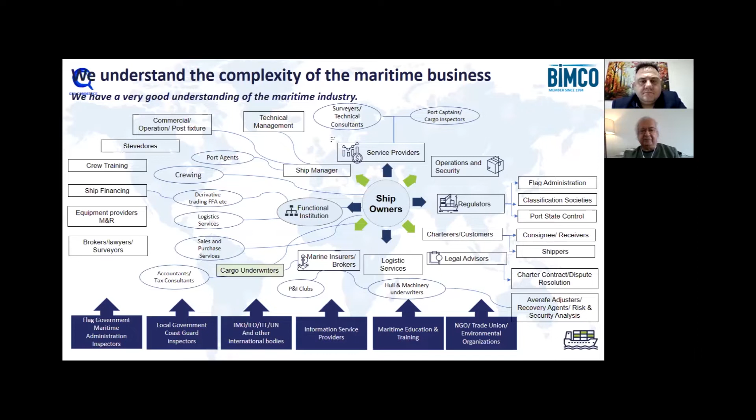Because of my involvement in the industry, I understand the complexity of the maritime business and the interactions of the ship owners with first-hand experience, because I have traversed all the segments. We offer technical support services, especially in China with our strategic partner there, and all sorts of aspects which are listed here, plus in India, Middle East, and Americas.

Now, this is the executive summary of my presentation. Please do not believe in anything simply because you hear it from somebody. Don't believe anything because you see it written somewhere. But after observation and analysis, when you are convinced that anything agrees with reason and is conducive, then only should you follow that. Basically, what I'm trying to say here is that everybody has got an opinion and everybody wants to try to sell you something. I'm not selling anything because I'm not employed by the methanol industry. But I'm telling you from my personal experience as a ship owner about the benefits of methanol as a fuel.

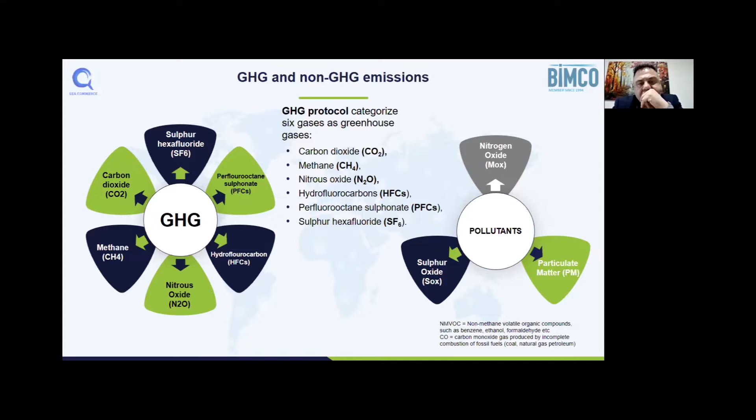There are two types of regulations: one deals with greenhouse gas, which is right now on the decarbonization side. The other one was the pollutants, where the new regulations finally went into effect in 2020 for SOx, NOx, and PM. Now the focus is on decarbonization: carbon dioxide, methane, nitrous oxide, and hydrofluorocarbons. So the 6 main GHG gases.

The international shipping GHG footprint is 2.7% of the total global CO2 footprint. But it is one of the most heavily regulated industries. And for the regulations which come up to be applied to the ship owners, in my personal opinion, the ship owners are not given a proper time frame to make the adjustments, because it's not a cosmetic change they have to do on the ship, but they have to do major modifications to the engines and all that.

And sometimes, because the ships have got an earning life cycle, if they're close to finishing off their earning life, the banks will not be able to help them finance these changes, which may cost them tons of money. So now the reductions for IMO goals are focused on GHG. IMO wants to reduce the carbon intensity in comparison to 2008 by 40% by 2030, and by 50% by 2050. So all the regulations and all the decarbonization efforts are based towards that.

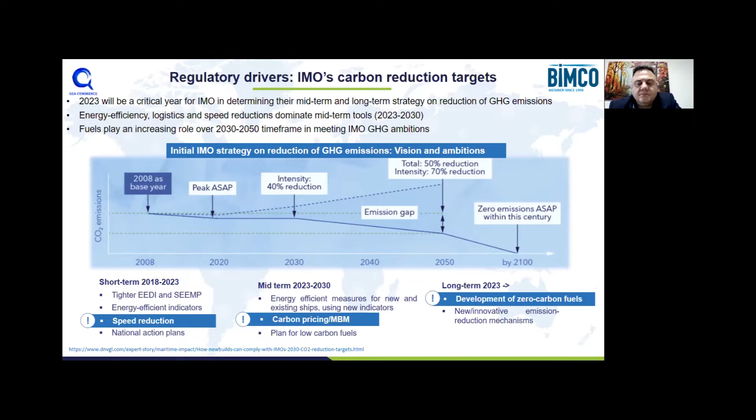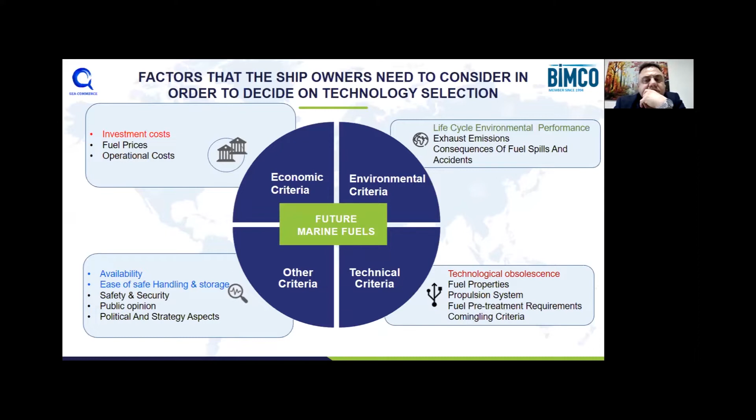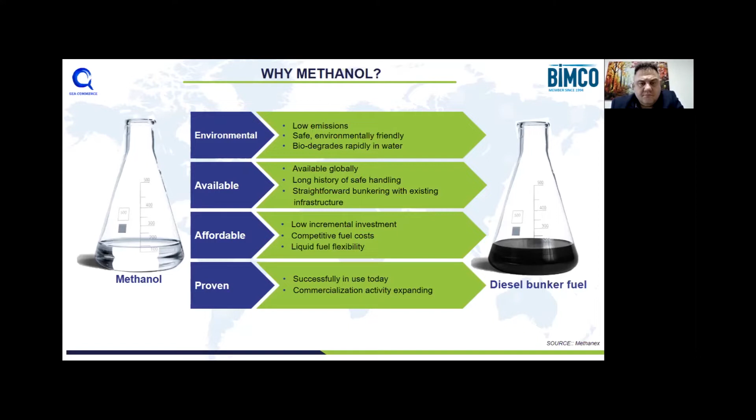Why methanol? Environmentally, it's low emission, safe, environmentally friendly, and rapidly biodegradable in water. Availability: there are 122 ports where methanol is available, and a long history of safe handling, because the methanol trade is close to about 50 million tons a year, and it's been handled on ships for time immemorial now. And the investment cost is pretty competitive when you compare to competing fuels like LNG, ammonia or hydrogen. Methanol is very competitive, and it's a proven technology.

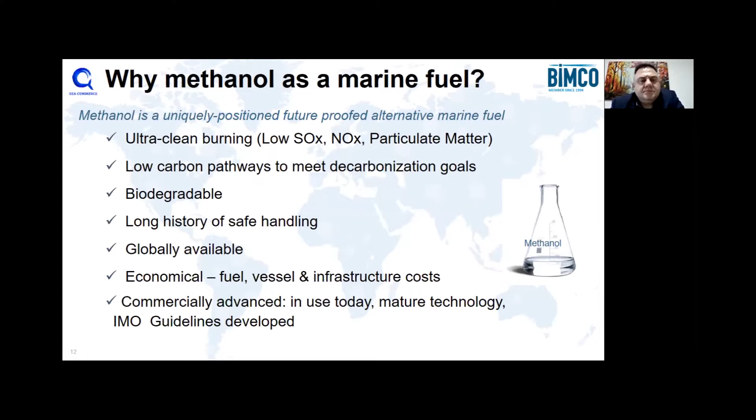Methanol as a marine fuel is ultra clean burning, with low carbon pathways to meet decarbonization goals. I mentioned biodegradable in the previous sheet, long history of safe handling, available, and economical fuel, vessel, and infrastructure costs. About methanol, the total production is 98 million tons, produced from natural gas as a feedstock. There is 30 million tons which is produced through coal to methanol using coal as a feedstock, and basically all that 30 million tons is done in China.

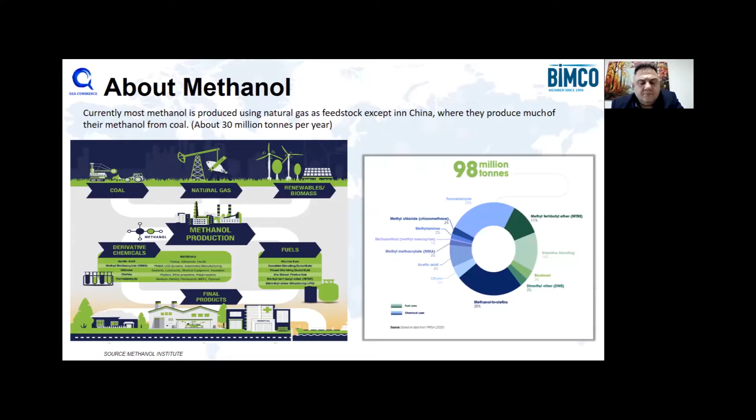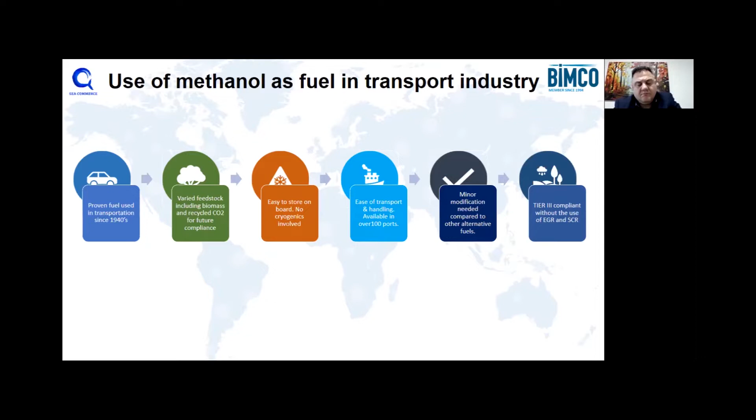For the fuels which are available, the fossil fuels are the cuts of the crude barrel, which is on the left-hand side. From there, you produce fuel oil and diesel oil or gas oil. And from natural gas, you produce LNG, natural gas, methanol, ammonia, and hydrogen.

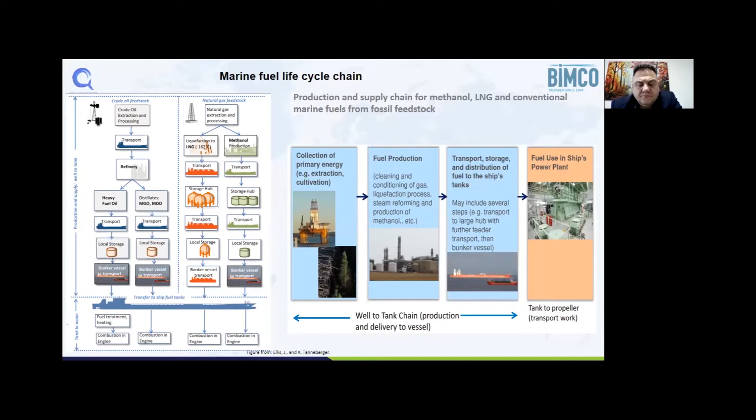Principal pathways for the methanol productions. There are 4 ways to produce methanol. One is the coal, which is called brown methanol. Then there's from natural gas, which is called gray methanol. And then from renewable electricity, what is called e-fuels, which is called green methanol, and the biomass.

So different feedstocks are used for all this. Like for example, for the renewable methanol or the e-fuel, you use wind power or solar power to produce in order to achieve the zero carbon footprint.

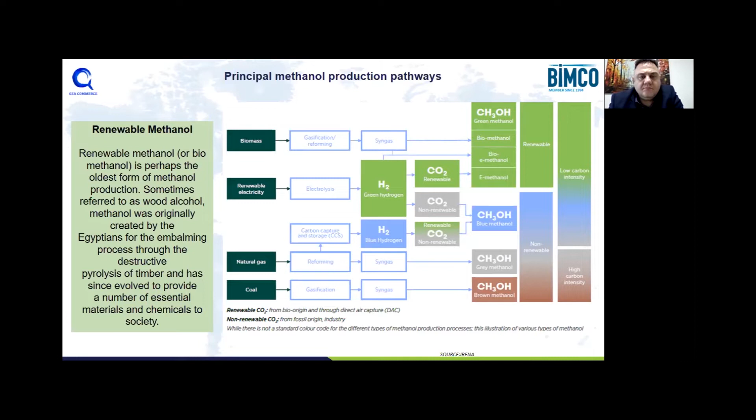The gray, blue, green methanol production cost: the current fossil fuel gray methanol cost is given in the gray in the bottom, and in comparison to that, the green and blue methanol production costs are given for comparison purposes.

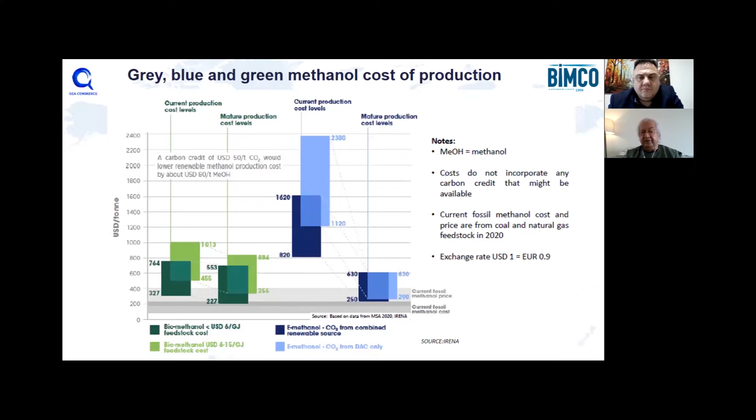Just 1 second, please. I need to move this because it's blocking my view. Yeah.

This is the main factor for decarbonization. If you look onto the left side, the bar, which is GHG emission as gram CO2 equivalent per MJ fuel consumption. The MDO is the threshold, and then LNG without the methane slip is what you see always when people talk of LNG. They show you the LNG with 0% methane slip as the second bar, and LNG with methane slip is the third bar.

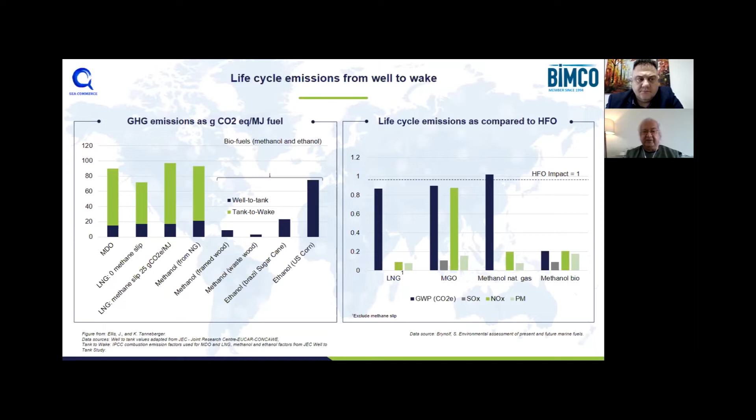On the production side, another thing which is mentioned all the time is the capacity; this is the development of the capacity. It's not much of an interest right now, but it will be where the capacities are being added. If the methanol as a marine fuel demand picks up, it's not difficult to establish new facilities, because I've talked to the various major producers and they are willing to do it. It takes 2 years to get the production going, let's say 10 million tons or 20 million tons, whatever is required for the future needs.

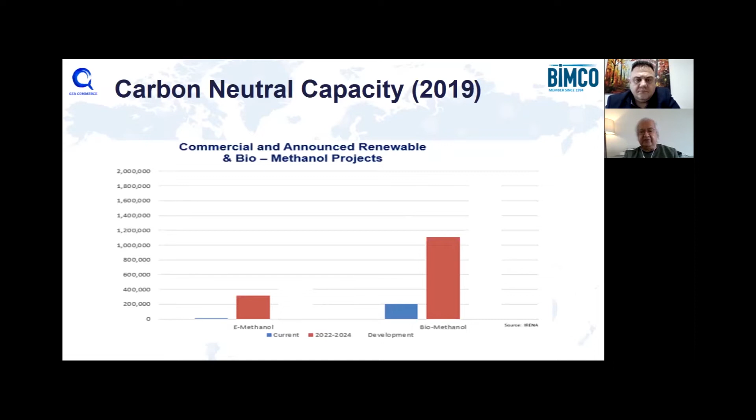Now this one reflects the commercial and announced renewable and biomethanol projects. Renewable using wind energy, or biomethanol using the biogas or the forestry waste or the wood waste, as I mentioned. These are the announced projects for that.

Low cost infrastructure, capital costs, and the payback time on the investment on methanol, new or retrofit, according to EMSA, is 2 to 3 years payback, because of the simplicity of the fuel; the fuel characteristics are the same as the fossil fuel.

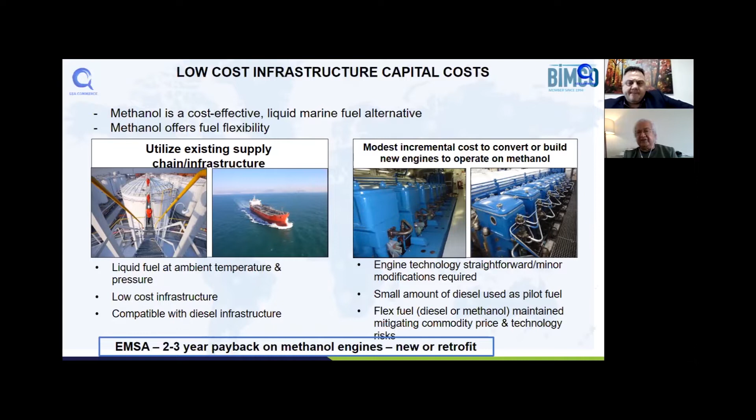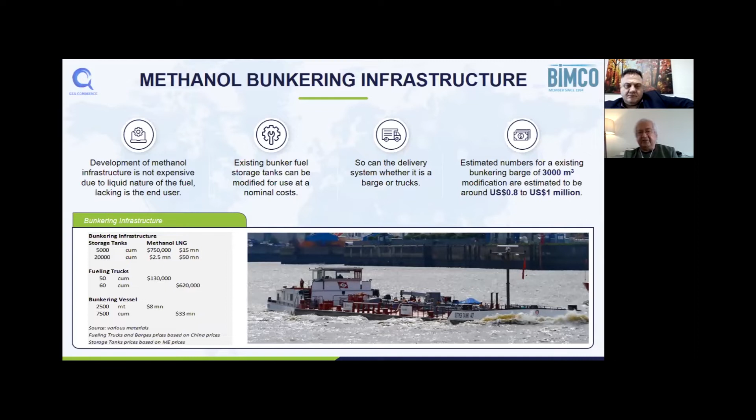The ship in the background is a Methanex Waterfront ship. The bunkers were delivered to it on an existing bunker transport barge. There was no modification done to the barge, and it was allowed by the Port of Rotterdam to deliver bunkers to this ship. I think it was in May of 2021.

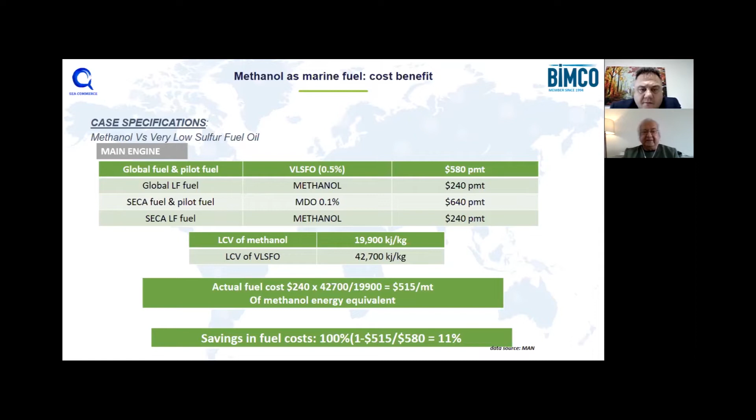This slide is from MAN. If you calculate on the LCV basis, very low sulfur fuel oil's calorific value is 42,700 kJ per kg. Methanol is 19,900 kJ per kg. If you do the mathematics, these are 2-year-old prices, which are not applicable today because prices have gone up, but the delta is the same currently. The saving in fuel cost for using methanol in comparison to VLSFO is 11%. Methanol is better, 11%.

Now I talk about the investment costs. On 2-stroke 50-bore engines, let's say for an MR2 new build, approximately the delta between a fossil fuel ship and a methanol ship is $3.5 to $4.0 million. Retrofit is $8 to $9 million, but needs a parent engine test. If the parent engine test does not exist, this price will be higher. It depends on the OEM, how much they want to charge.

What are the additional things on a methanol dual fuel engine? Approximately the LFSS, day service tank with accessories, pump room, housing and ventilation, fuel valve train, double wall piping, ventilation, gas detection system, additional firefighting systems, and tier 3 technology. The equipment is not required. So basically, methanol, when you mix it with water, can comply with the tier 3 requirements, and that does away with the SCR and exhaust EGC systems, which gives a benefit of close to about $2 million savings on the new build cost.

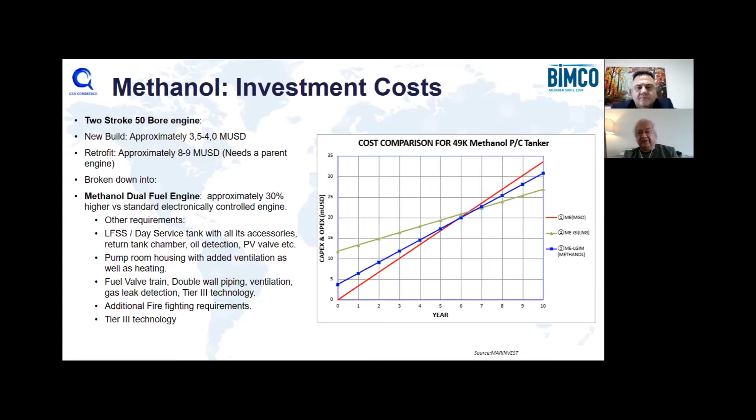Now, the greatest advantage of methanol is that the methanol molecule, whichever way you produce it, whether it's brown, gray, blue, green, has got the same energy and chemical characteristics no matter how it is produced. So what we are trying to say over here is that gray methanol today has a saving of 10 to 15%. By mixing it with blue methanol, the savings will be higher. And similarly, mixing it with green methanol, the savings will be up to 90%. So if the threshold is 60% reduction in CO2, you adjust the mixture accordingly without doing any modifications to the engine, and you will be able to achieve those savings.

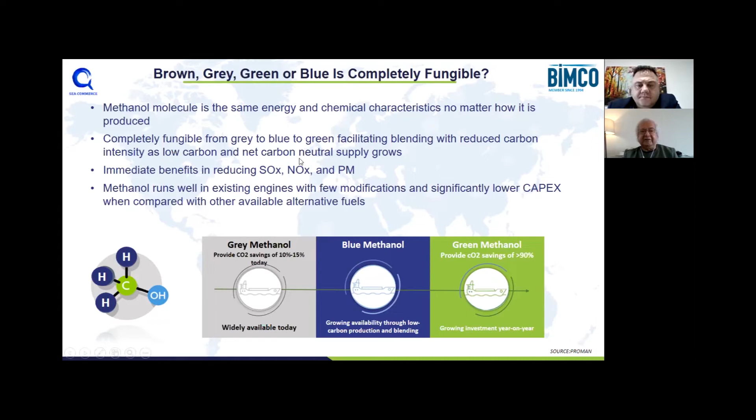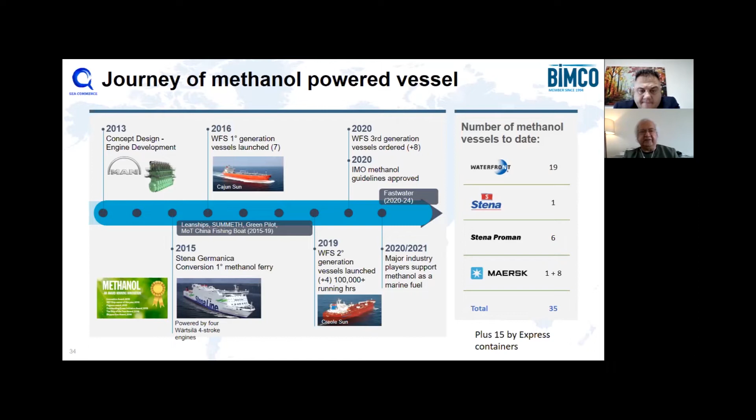More and more companies are getting interested. Just today, COSCO has come out with the design for a methanol-powered VLCC. It was announced today. And currently, there are about 50 ships on order, because Maersk has got 9, plus 15 were ordered by Express Container about a month ago. So there are about 35 to 50 vessels which will be methanol-powered vessels in 2023. And there are companies interested in ordering methanol-powered vessels. So there is a tremendous interest now in methanol-powered vessels.

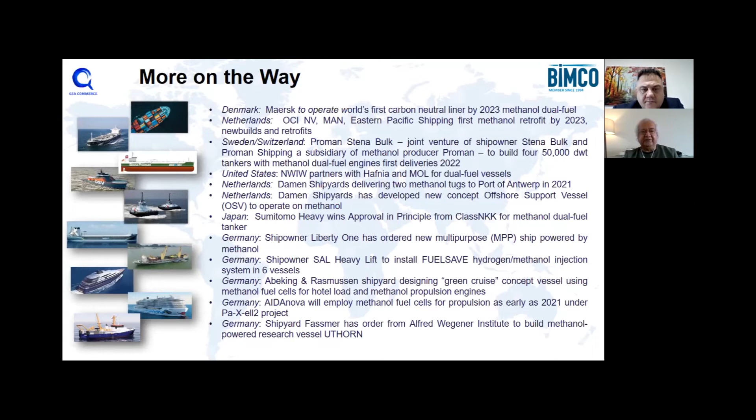Even the companies which have LNG-powered ships are also looking at methanol. For example, Hapag-Lloyd converted one of their ships, which had the class rating of LNG ready at the time of construction in 2014, and went in for conversion to LNG. It cost them 2 years in the yard and $35 million to do the conversion.

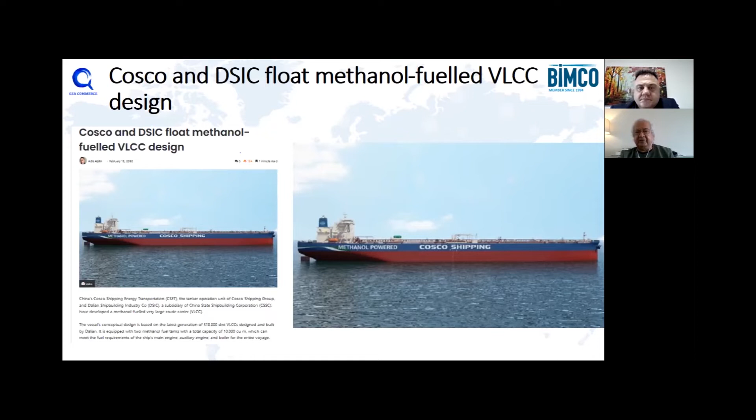Yeah, this was announced just today. COSCO and DSIC float methanol fuel VLCC design. China has got a methanol policy that they want most of the transportation to be using methanol by 2050, and they are working towards it. And I think this is a major shift, a major impact COSCO will have on the methanol-powered ships order book.

I'm going to talk about the Mari Jone and Mari Boyle. These are the first two methanol-powered ships, built by Marinvest. And there are some performance slides I have put over here for the attention of the Turkish ship owners here.

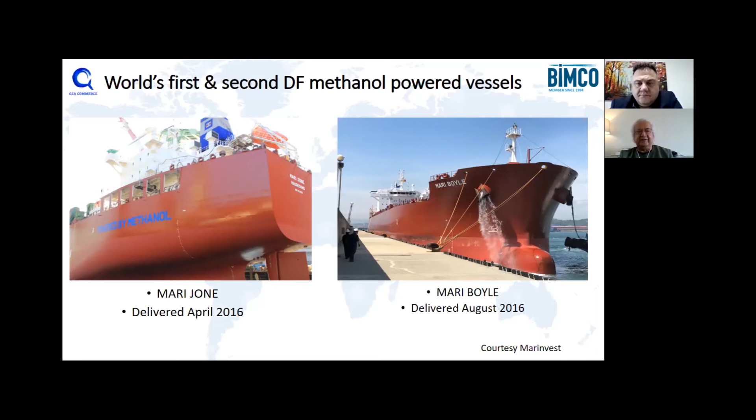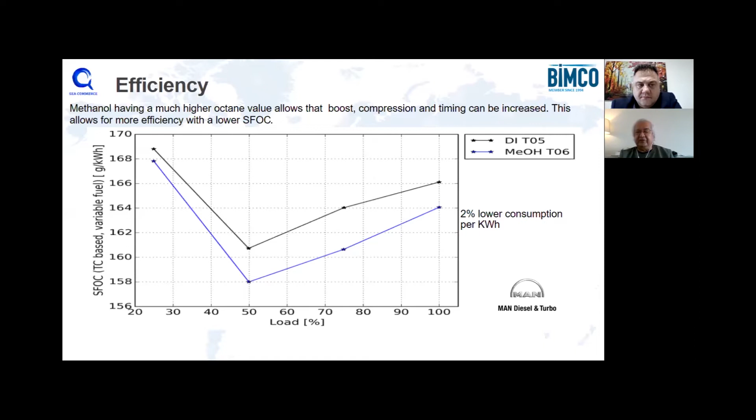Efficiency: methanol having much higher octane values allows that the boost, compression and timing can be increased. This allows more efficiency with a lower SFOC. So it's 2% more efficient per kilowatt hour than if you were using MGO or LSFO.

On the road, this company, Marinvest, has got 40,000 hours of experience operating these vessels. And I will read what Fredrik Stubner, the Director Technical and New Build, has to say. Our ships continue to operate on methanol on a daily basis, so it's full-time methanol operation. Although the engine is called dual fuel, basically it runs on 3 fuel options: HFO, LSGO, and MeOH. This gives flexibility in many scenarios that benefit stakeholders.

That basically means that if gas oil prices are cheaper than methanol, then you can change over, you can use gas oil instead of methanol. If methanol prices are cheaper than gas oil, you take advantage of the pricing on that. With an average 3.5 to 5% of primary fuel burnt at sea on a daily basis, these engines are the best in terms of emission control.

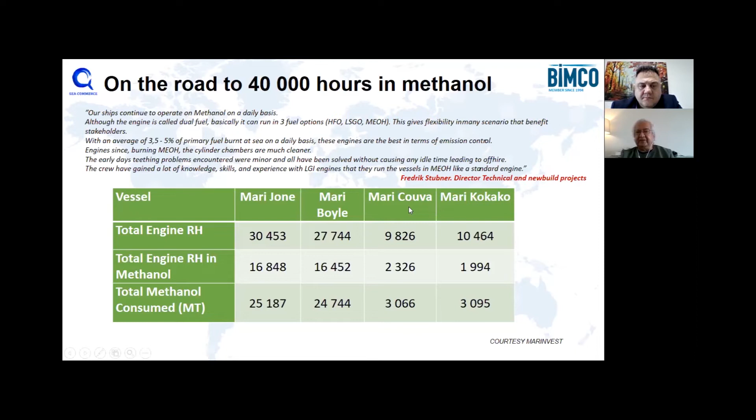Engines, since burning MeOH, the cylinder chambers are much cleaner after 4 years of experience. The early days teething problems encountered were minor and all have been solved without causing any idle time leading to off-hire. The crew have gained a lot of knowledge, skills and experience with LGI engines that run the vessels on MeOH like a standard engine. And this I'm quoting Fredrik Stubner, the Director of Technical and New Build Projects.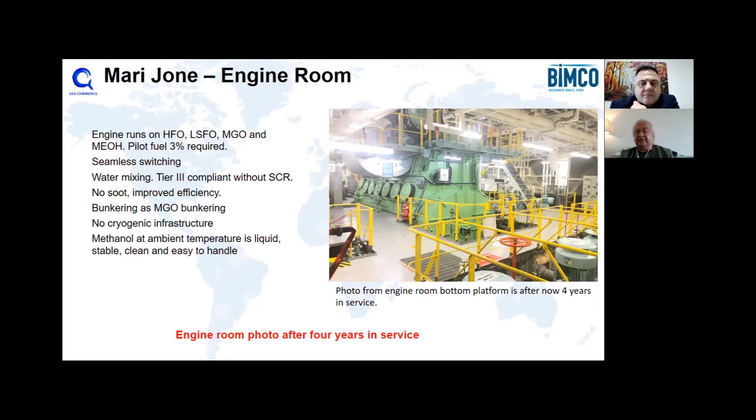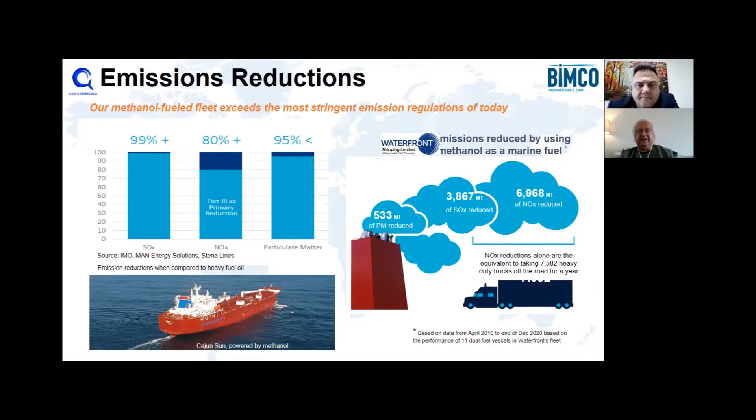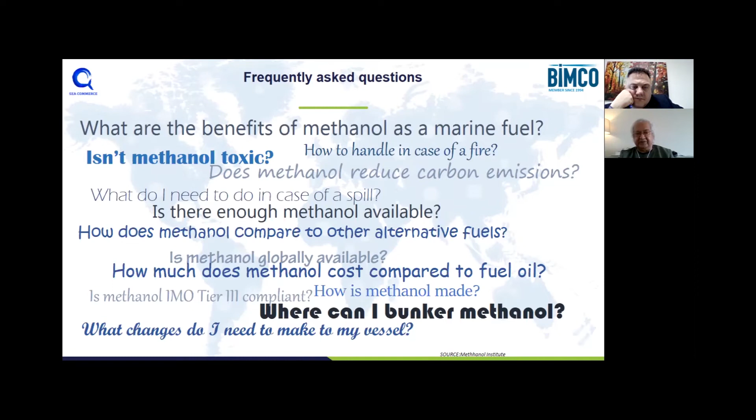So what about the other pollutant side? Methanol reduces SOx by 99%, NOx by 80%, and particulate matter by 95%. Now, what are the benefits of methanol? There are various questions which have been asked constantly of me whenever I present or when I'm holding my seminars. I don't have time to deal with all of them individually over here, but I will deal with some of them going forward.

One of the things which you constantly hear is that methanol is extremely corrosive and it causes corrosion to the engine room. Now, this quotation I have over here is from MAN. They say corrosion is not an issue, even though methanol is corrosive. No changes to the corrosive level in the combustion chamber are expected when using it as a fuel in standard engines, nothing special. Already today, we have quite a corrosive environment in the combustion chamber, and the combustion chamber is designed to cope with it.

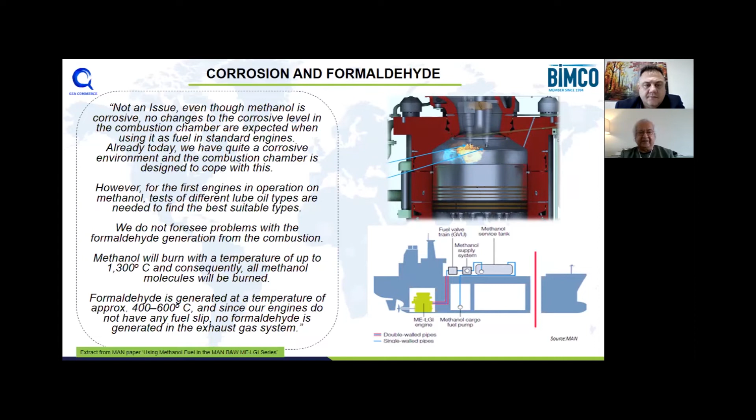Methanol will burn with a temperature of up to 1300 degrees Celsius, and consequently, all methanol molecules will be burned. Formaldehyde, which is the reason for corrosion, is generated at a temperature of 400 to 600 degrees Celsius. And since our engines do not have any fuel slip, no formaldehyde is generated in the exhaust gas system. So the corrosiveness talked about by the competing fuel providers is not an issue at all, according to MAN.

If you look again at the hazard part of it, at the pictograms on the top comparing methanol, diesel, and gasoline, methanol is less hazardous than gasoline and diesel, as the slide reflects. It is not more dangerous than other fuels, gasoline, diesel or LSFO.

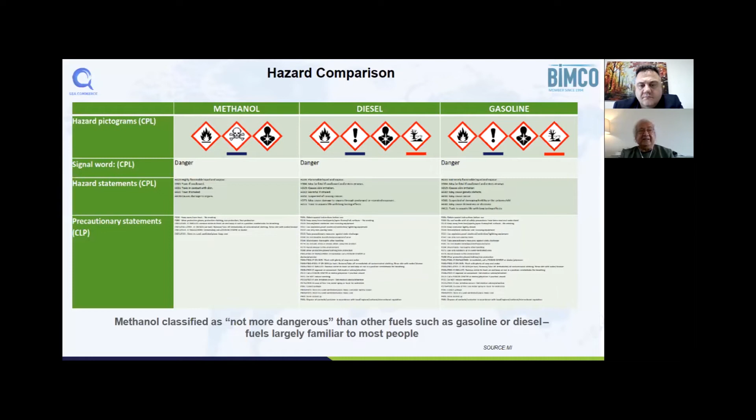Methanol is fully miscible in water. It is soluble in water. So if there is a spill, here we have got LC, the lethal concentration, which is the threshold when half the population of marine life will die within a specified test duration.

It will require 15,400 mg per liter of methanol spill to achieve the level of LC50. Whereas gasoline was only 8.2, diesel is 65 mg, and methane, which is LNG, is 50 mg per liter to achieve the lethal concentration of 50, at which the marine life will die.

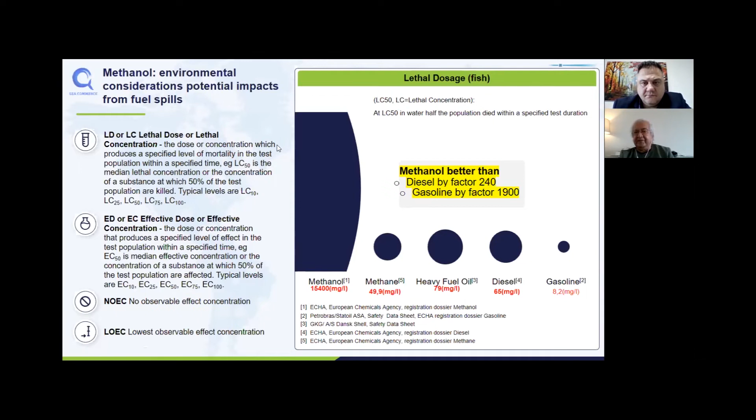Now, the next slide here shows that when the accident with Erika happened, the tourist industry suffered $400 to $500 million, claim for damages $120 million, 60,000 birds were killed, fishing industry $98 million, cleaning in hundreds, and on and on.

Methanol tested with 10,000 tons on the simulation. Release of 10,000 tons of methanol at open sea, the concentration was 0.36% after 1 hour. It's basically soluble in water, so it dissolves, and there is no threat to the marine life as such.

Similarly, simulation second: release of 10,000 liters per hour from a coastal pier. The concentration was 0.36% after 1 hour and 0.13% after 3 hours. So what I'm trying to say is there is zero spill possibility with the use of methanol as a fuel. This will have an impact on your blue card also for oil spills and all that, and shipowners should discuss that with the insurance companies.

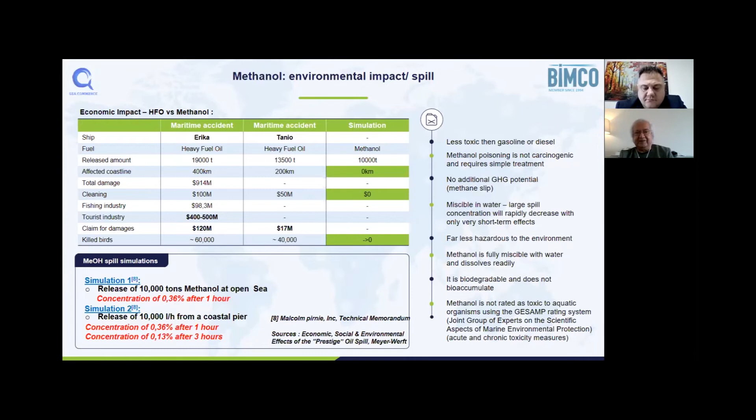This is another thing: methanol, because the storage factor is twice that of fuel oil, 2.16 times, requires more tank space to store. And that will restrict the sailing distances.

But no, it would not actually restrict the sailing distances, because when we do voyage planning, we don't take the full bunkers, we maximize the cargo intake, and then we bunker the vessel on the way somewhere in order to maximize the cargo intake. So the same philosophy can apply to methanol.

And secondly, methanol, because it does not have a risk of pollution, it can be - for example, right now Methanex is using the slop tanks as storage tanks also if they are going on a longer duration voyage. And it is approved, and there are no issues with the Coast Guard or anything.

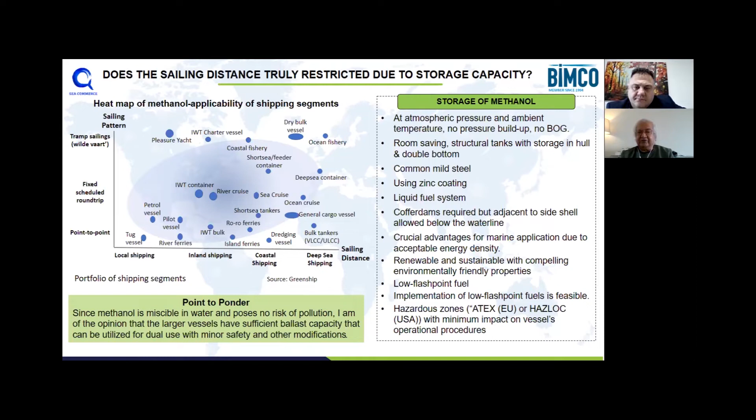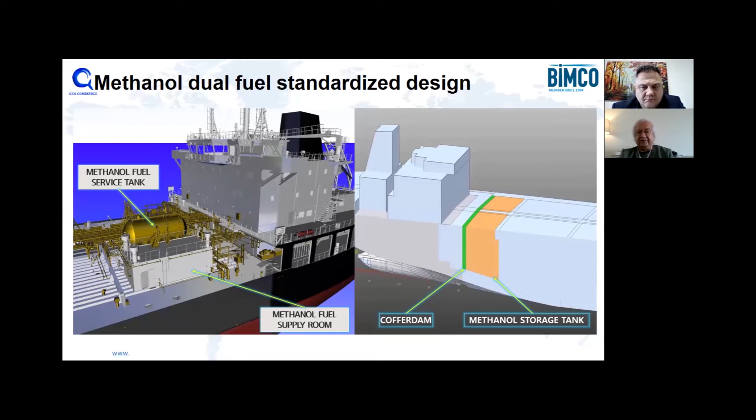This is a methanol dual fuel design, which has been already there for MR. You can see that there is a cofferdam and methanol storage tank, between the accommodation and the methanol storage tank. Basically this is already there, available. Today you saw the VLCC design has also come out.

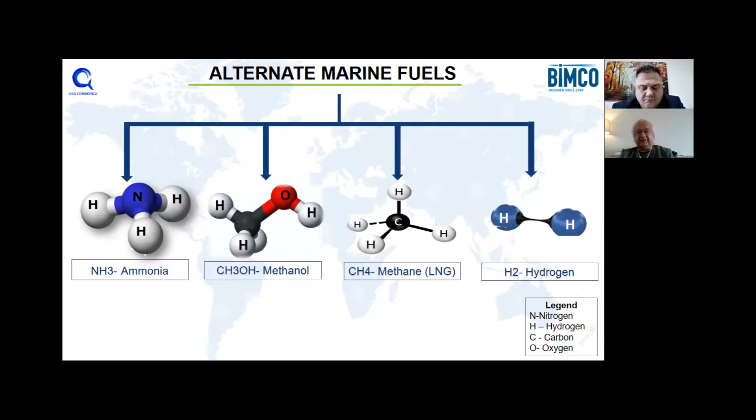But overall, methanol is also competitive on that one also.

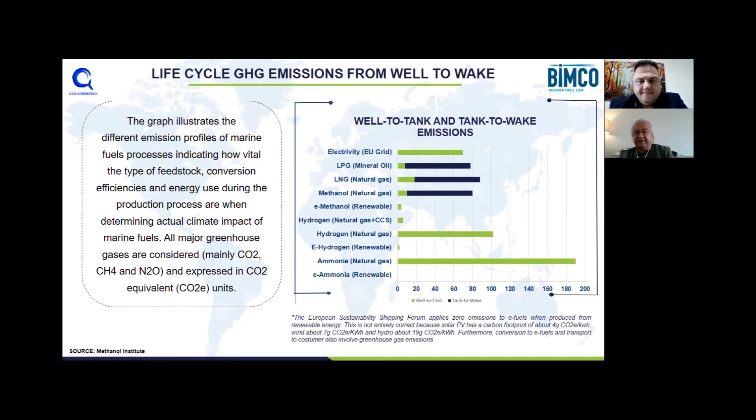Now, technology readiness level, TRL: diesel is of course 9, liquefied gas is 8, methanol is 8, but hydrogen, liquefied hydrogen, ammonia is 3 to 4. That still has to go a long way. The first prototype, the engine, will be ready for ammonia, set to be in 2024 and 25. It will be on the test bench. So by 2030, when you have to reduce the GHG footprint under the IMO regulations, I think it will require another 10 or 15 years before the technology is going to be mature enough.

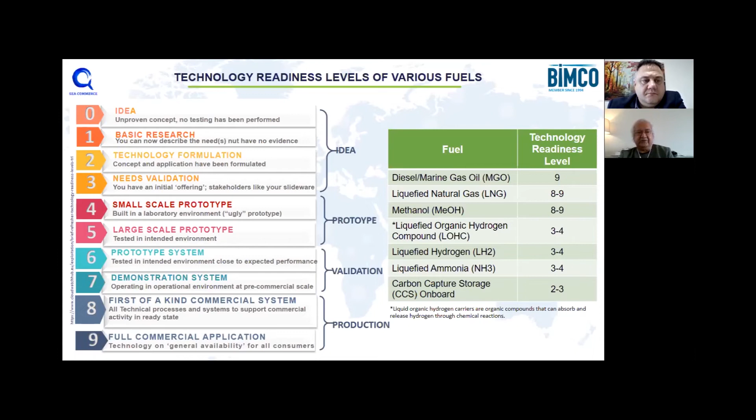This is a very important slide. Once again, yes, LNG has got a higher calorific value when it comes to per ton basis. But on the ships, you use the volumetric energy on the basis of volume. So this slide reflects the energy per volume of tank system.

Because if you have got a 10,000 cubic meter tank for LNG, the space is wasted over there because it has to be double skin, then it has to have a protection coating inside, and the calorific volumetric density of LNG reduces from 22 to 16, which is similar or sometimes less than methanol, which is 15.9 on the volumetric basis. So diesel is the perfect fuel because on the volumetric basis, MJ per liter, it's got a volumetric density of 35, 36.

Methanol is next. And then all three fuels - LNG, liquid ammonia, liquid hydrogen - they are all cryogenic fuels, which basically means they're carried at below 0 degree temperature, and they require special handling plus special equipment and everything.

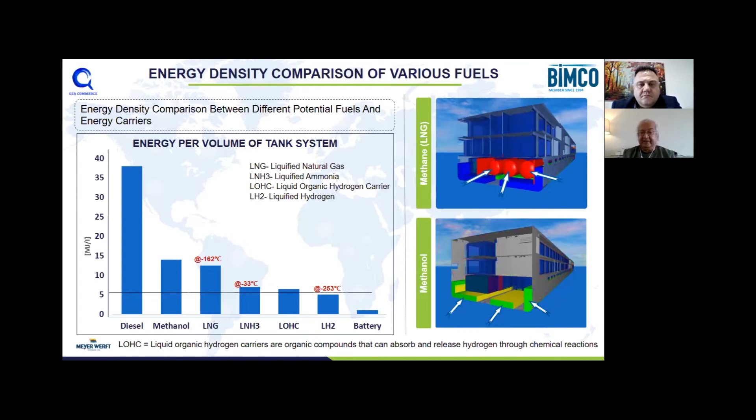Here I'm doing a comparison on LNG. There are various things which people do not know about LNG. I cannot talk on all of them right now, but I will talk on some of the important things which have got an impact on pricing, like custody transfer, methane number, and other differences.

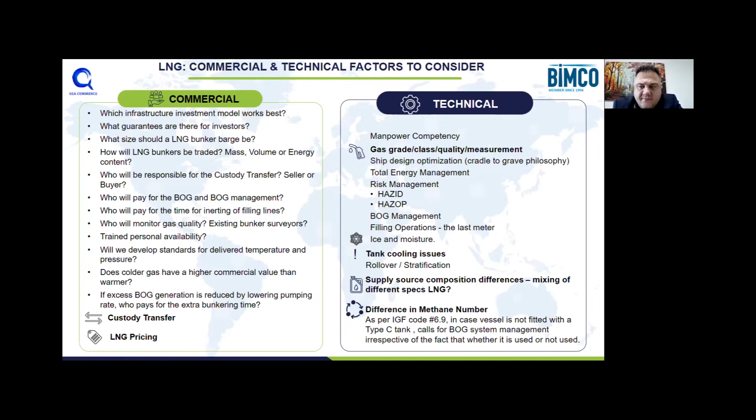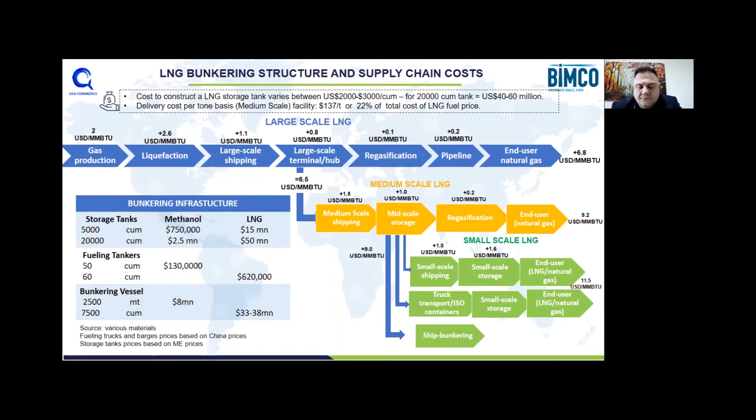Because LNG, when it is pumped out, has got gas in it, like the cappuccino effect on fossil fuels, there are losses that occur from there. Those losses were, for example in 2010, 440 million euros for LNG transfer, or 200 million tons of LNG.

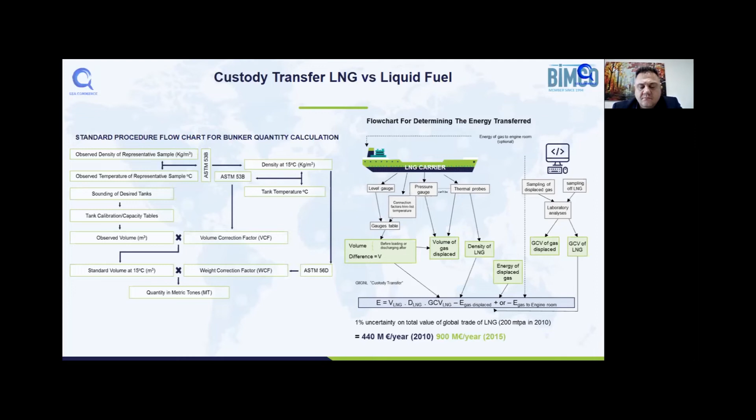This is another important slide. The fuel qualities of LNG vary, and normally you do not mix two different qualities of LNG because of stratification and the fear of rollover. I have highlighted the LNG coming out of Arzew, Algeria, and Skikda, Algeria.

The C1 is 87.4, and in Skikda it is 91.5. The methane number is 72. This is important because it will cause the derating of the engine if you are out of specs. The methane value for Arzew is 72.3, and for Skikda is 77.3. So this is another issue which needs to be monitored when bunkering with LNG, which is not there in methanol because the specifications are the same.

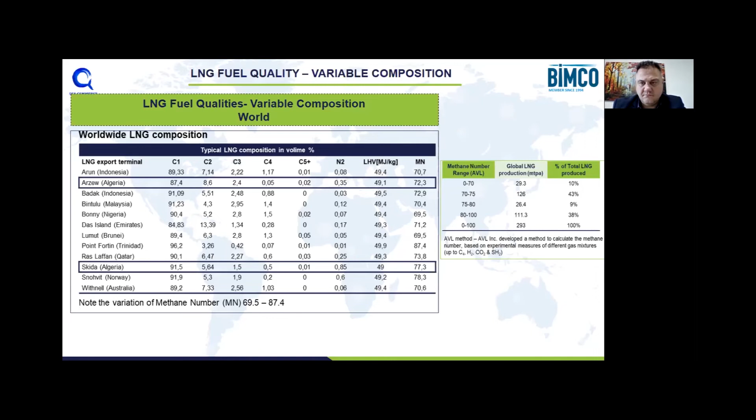This is the checklist. The checklist for fossil fuel is 3 pages. The LNG bunker checklist, ship to ship, is 28 pages. What I'm saying is it will take 16 hours, or 8 or 10 hours, just to go through the checklist both before and after bunkering. Whereas for fossil fuel, it hardly takes more than an hour to go through the checklist and start and finish bunkering.

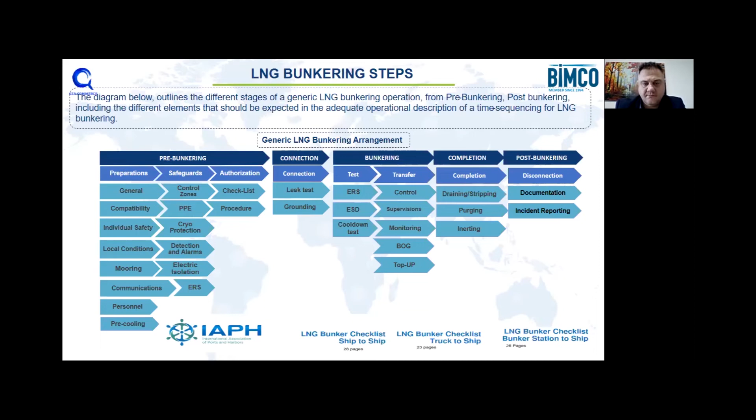Similarly, it is said that LNG has got particulate matter. It's incorrect. The slide shows that LNG has got a higher particulate matter footprint than diesel oil, as per the findings of Transport and Environment out of Belgium.

Maersk has ordered, this is the headline, and there are two things. Now I'm talking about the commercial side of it. Maersk has ordered 16,000 TEU vessels, and the World Bank has said to avoid LNG because it is a midterm solution. This slide is from the World Bank, and it clearly says it's a short-term solution with a limited role for LNG. It doesn't see a long-term role. So if you're going to do an LNG conversion today, by 2030 you will have to go back to the drawing board and do another conversion of some sort because of the limited role of LNG.

And what the IMO thinks the long-term solutions are: the biofuels, which basically means alcohol fuels, hydrogen, ammonia, and carbon-based synthetic fuels.